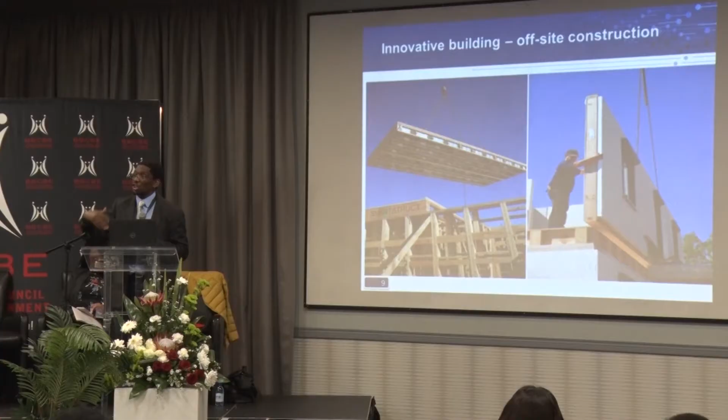This is another picture of the housing. Can you believe this is Toyota doing these things? Toyota is using their knowledge of understanding the production line of a car to actually build a housing unit. You get all these panels, and at the end of the line, they assemble this thing, lift it up, and put the house unit on the site, and they can stack it into a multi-story house. These are the things happening elsewhere.

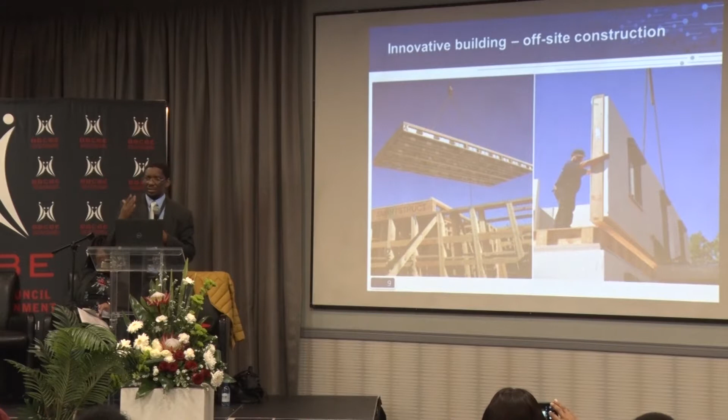I think it also reflects that the technologies are now, can I use the word, intermarrying. They are overlapping, and the borders are very difficult to actually delineate with this 4IR.

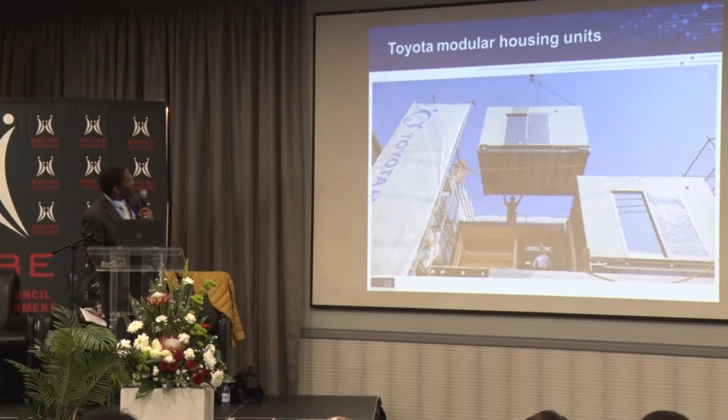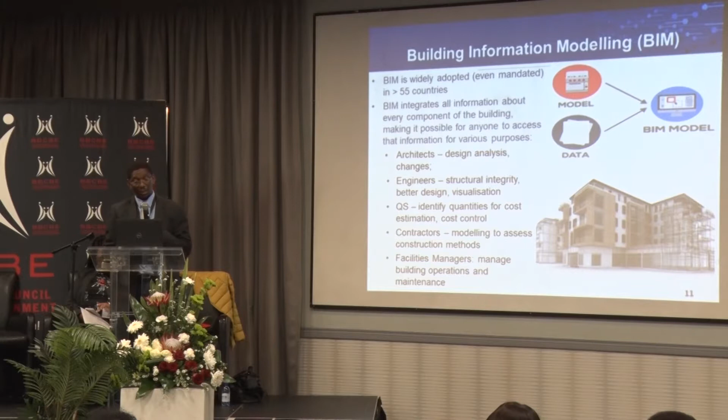We heard a lot about BIM. I really don't want to talk about it. It's a big development in other countries. We still need to catch up. We have heard about the advantages of it, and it's unavoidable. We have to go there.

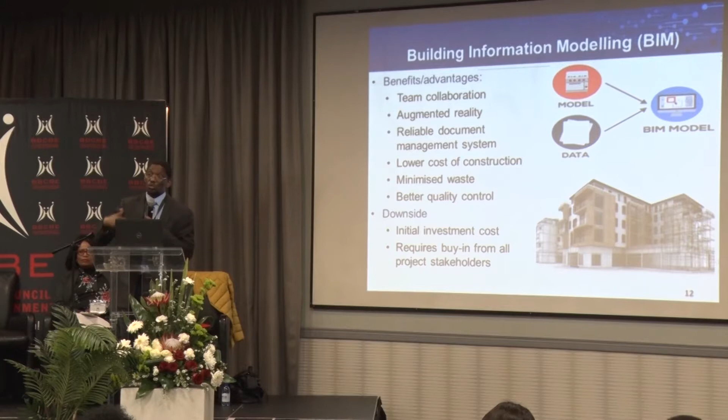I just want to say there are downsides to all these things, and we must be very careful, especially when we look at policy and we are advocating policy changes, that we need to be able to pick up the risks that come with these technologies. Some of the risks have been mentioned today. One is the shift of employment from one skill to another, which means we need to train people. But there are other risks, and we need to study them very carefully so that we don't just buy in blindly.

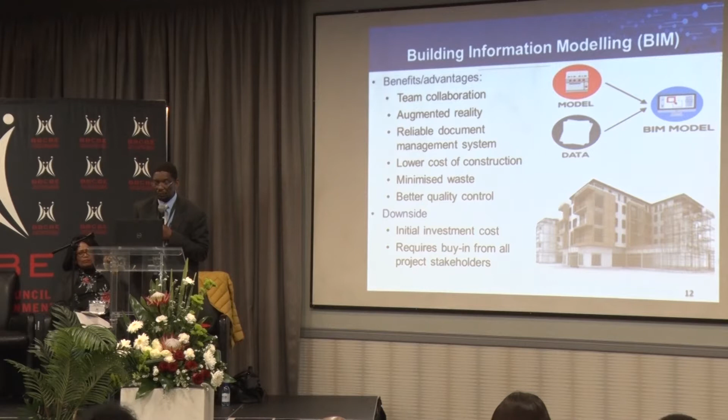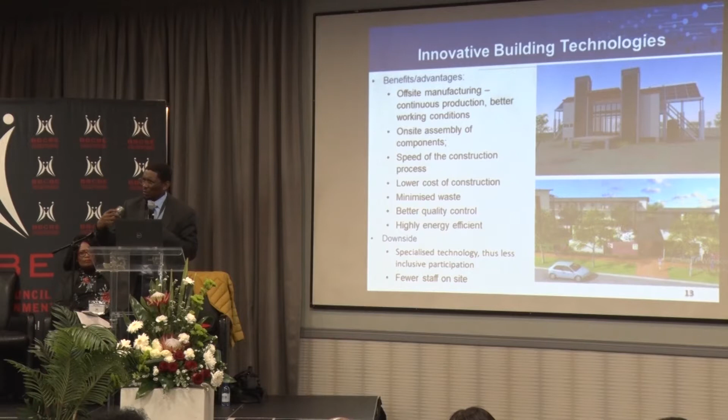My next slide also covers innovative building technologies. I'm not going to go into detail in terms of the benefits, but speed is the main thing. Cost of construction comes down because you're working so fast, and the quality and finishing of the building becomes better.

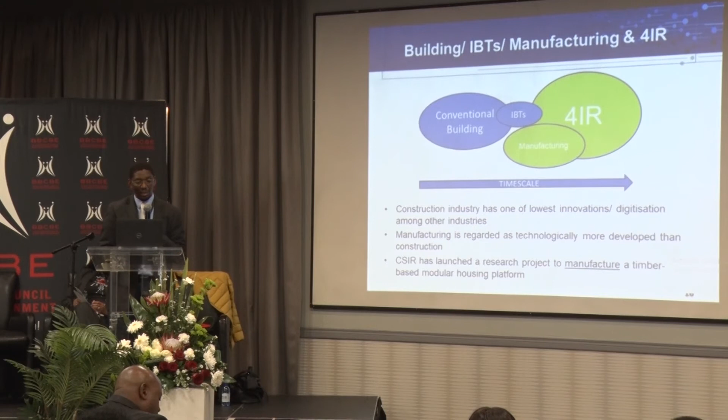The reason we are using timber is that the timber industry wastes about 50% of the tree when they cut it. So timber has a lot of promise - we can take that waste, whether sawdust or otherwise, and process it into things like cross-laminated timber. But we're still working out the modalities of exactly how we're going to do that.

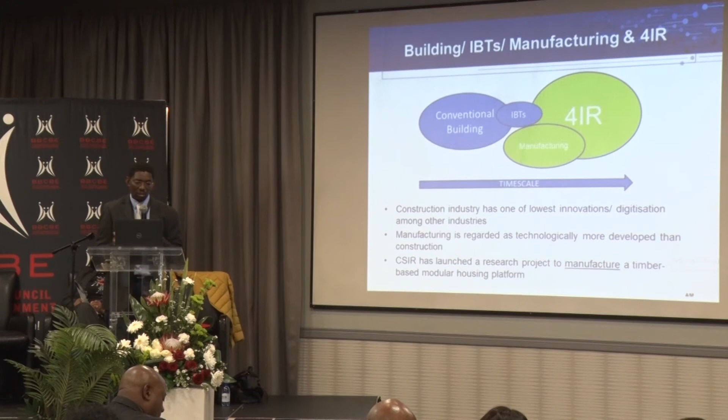Part of it is we are going to deploy 4IR technologies, like computer-aided design. Sorry about this, I've been talking all along and you weren't in the picture. This is the unit we're working on at CSIR. We are going to look at computer-aided design, computer-aided manufacturing, and how it links with BIM, which the prof and Joe have been talking about, to marry these two technologies from construction and manufacturing. So that is one project.

The other project looks like a very simple brick and paver. In a sense it does the same thing - these are bricks and pavers. But what's different is it doesn't have OPC cement; there's no cement in the mix. We've used fly ash and geopolymers to produce these products. Using fly ash has advantages for the environment because it's dumped by ESKOM - there are mountains of fly ash we're using to produce something like this. If you look at the strength of these things, it's as good as any brick.

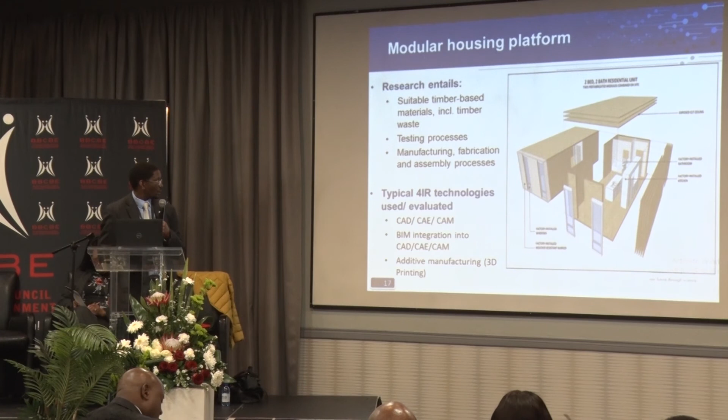So there's also, in terms of 4IR technologies, nanotechnology involved with these bricks - fly ash as well as geopolymers, and different clays that we can dig up. There's a very interesting project in Limpopo we did to identify clays, and we need to go into those communities, talking about localized economic development, to empower people so that with materials available locally, they can use these special clays to make their own bricks and pavers.